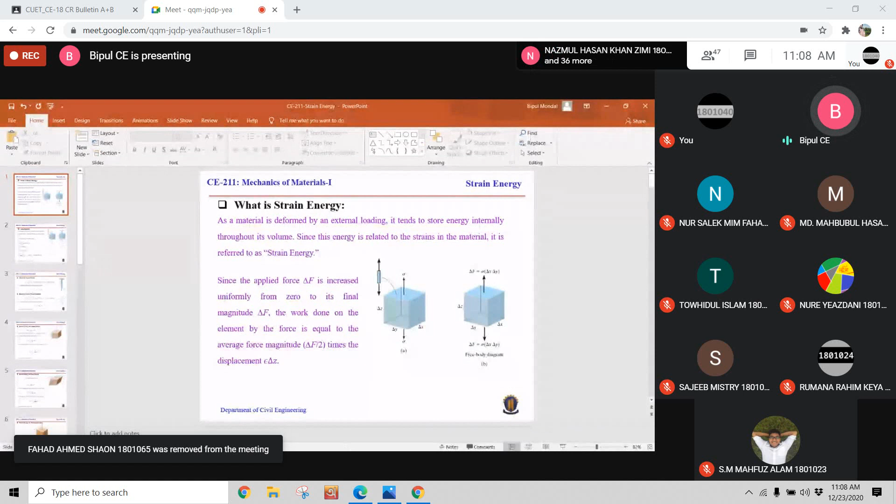Okay, so recording is started. So I can start the class. So today I will discuss another new topic.

That is strain energy. So all of you know what is energy. Energy is nothing but work, and sometimes work is known as energy.

So what is work? Work is force times displacement. That means if a force is displaced from one place to another, then work will be done, and the amount of work will be force times displacement.

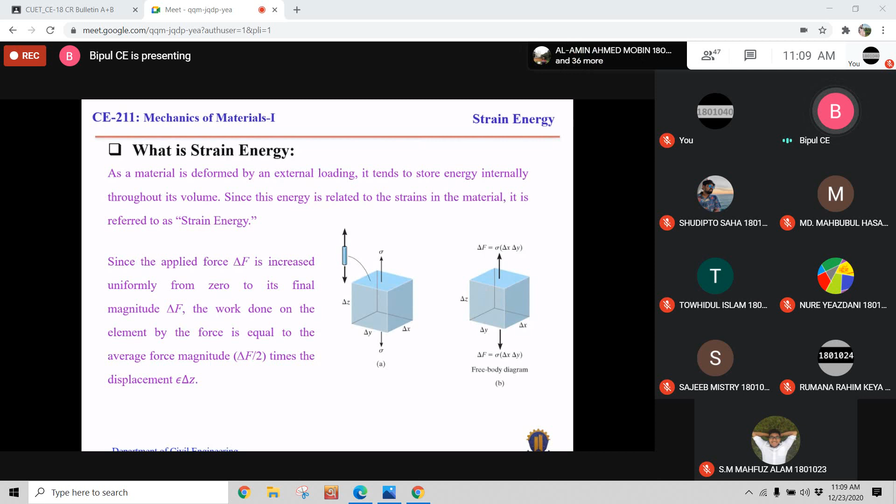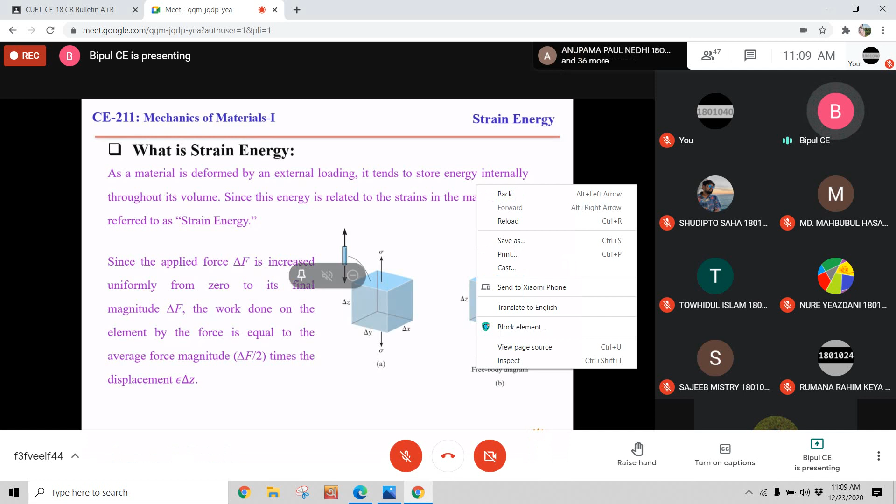So if any body or any structure is subjected to any kind of force, then there must be deformation in the body, and as the body deforms, the applied force must be displaced.

The displacement may be considerable or may be very small, depending on the applied force, but there must be displacement. So as there must be displacement, there must be work, and that will be force times displacement.

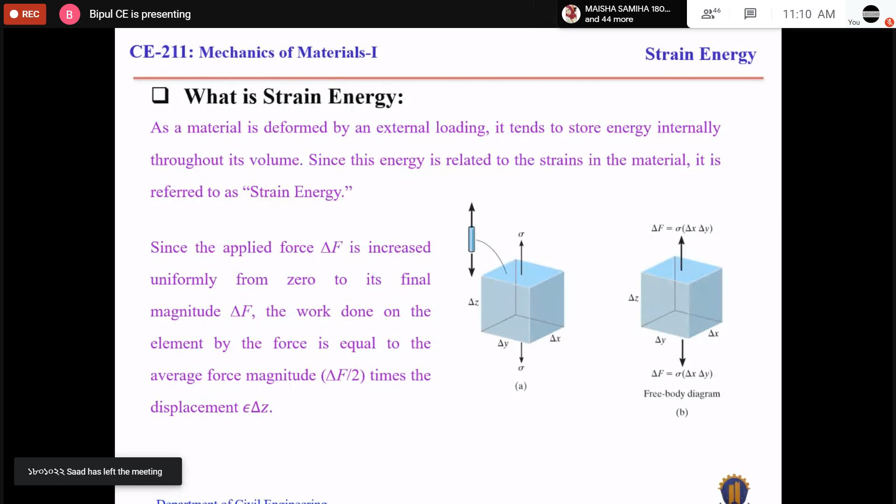In this case, displacement is nothing but the deformation of the body. So displacement is represented by the deformation of the body, so the work will be force times deformation, applied force times deformation.

That is the work, force times deformation. That is the external work, known as external work. Why is it external? Because it is done externally due to the externally applied force.

That is external work. And according to the conservation of energy, total energy is constant. No energy is lost. So according to the conservation of energy, that amount of external energy or external work will be stored in the body, and that energy is known as strain energy.

So simply, what will be the strain energy? Strain energy is nothing but the energy or work stored in the body due to the applied force. That is strain energy. So if we look at this figure, it is an element.

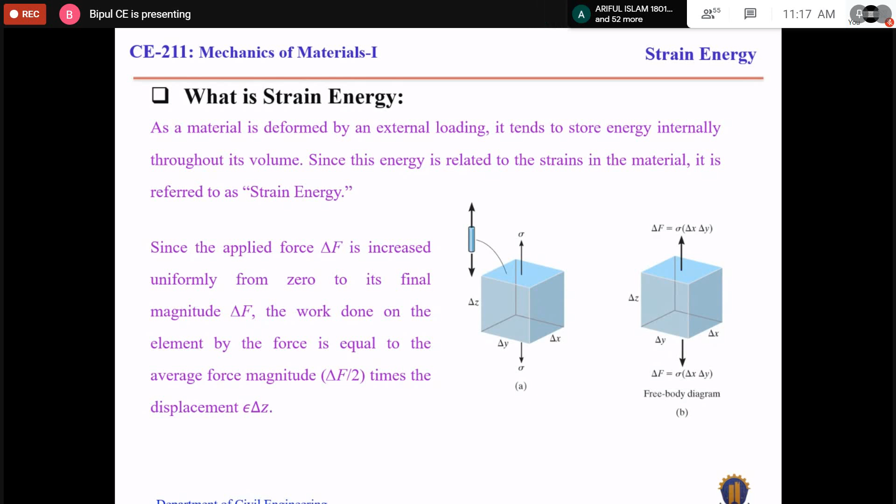This one is delta X, this one is delta Y. So total force is sigma delta X into delta Y.

In previous classes, I told you that to develop any mathematical equation, we always consider some assumptions. Similarly, to develop the strain energy equation, we have to consider an assumption. So what is the assumption?

Assumption means, if we apply any kind of force to any kind of structure, then there must be heat generated. Heat must be generated. And heat is also energy.

So basically, the applied energy or applied external work will be internal work plus heat energy. That means external work equals to work stored in the body plus energy lost by heat generation.

But for this type of problem, the heat generation is very, very small compared to strain energy. So we can assume that there is no energy loss due to heat generation. Therefore, the applied energy will be stored energy, or we can say external work equals internal work, and that is strain energy.

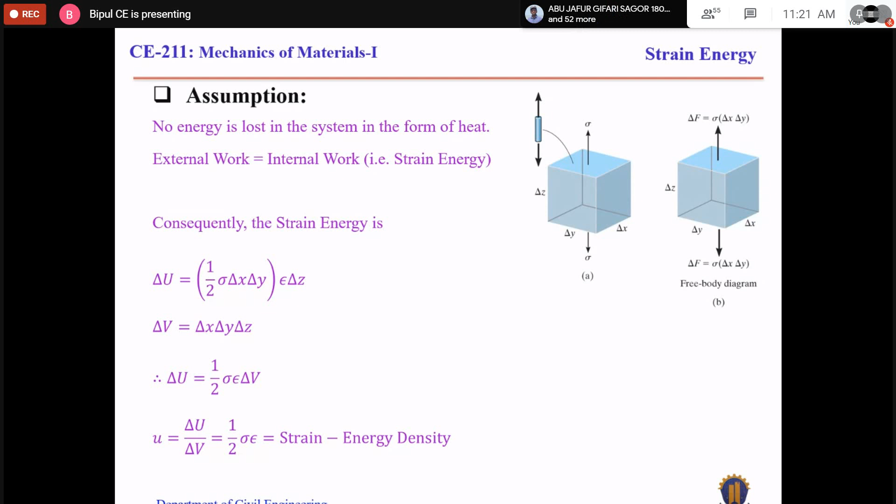Why? Because it indicates the energy stored in this amount of volume. So if we divide this total stored energy by the total volume, then we will get the energy stored per unit volume. That's why it is known as strain energy density.

Then external work done due to different types of forces. Sometimes the structure may be subjected to axial forces, which may be tension or compression. So if the structure is subjected to axial forces...

then the external work UE will be F into delta x, where F is the force and delta x is the displacement. And if we integrate over 0 to L, that means over the whole length, then we will get the total external work, and according to the assumption that will equal the total internal work, which is nothing but the strain energy.

And if the material is linear elastic, that means stress and strain are proportional to each other for any amount of applied force, then the equation of total strain energy will be half P delta, where P is the applied force and delta is the total deformation due to this applied force.

And the external work due to a couple moment. That means the structure may be subjected to couple moment, that is torsion, and we know due to couple forces, the displacement will be rotation. We know work equals force times displacement. If the element is subjected to moment, couple moment M, or torsion M, due to that torsion, the displacement is delta theta.

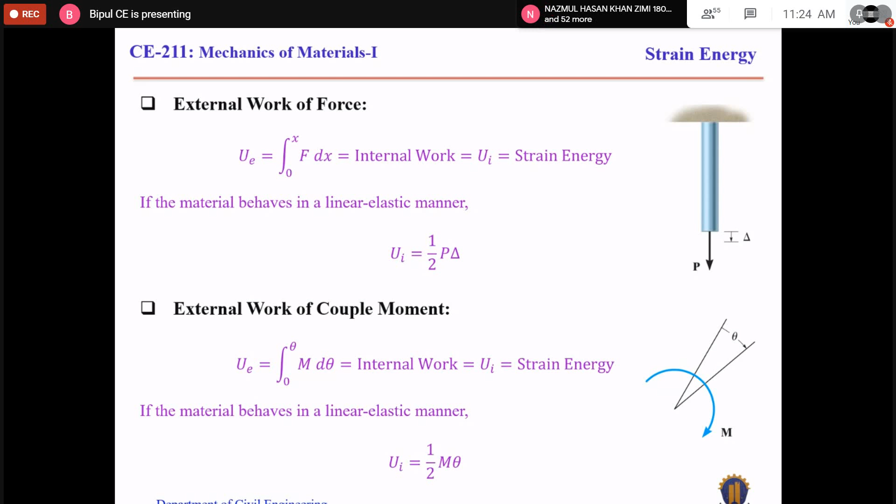So the work will be force times displacement, that is M delta theta, and to determine the total external work, we have to integrate over the entire rotation, 0 to theta. That is the total external work, and according to assumption, that equals internal work, this is strain energy. Similar to this, for elastic material, the total strain energy will be half M theta. M is the couple moment, not the bending moment.

dui, the strain energy, a small delta amount, which will be half sigma z times epsilon z dv, according to the previous equation. This equation indicates that the total strain energy depends on the volume. So to determine the total strain energy, we have to integrate this equation over the entire volume. This equation will give you the total strain energy.

If the material is linear elastic, that means stress and strain are proportional to each other, then the equation of strain energy will be sigma squared divided by 2E dv. E is the modulus of elasticity, and sigma is the applied stress. In this case, the element is subjected to uniaxial normal stress, that means this element is...

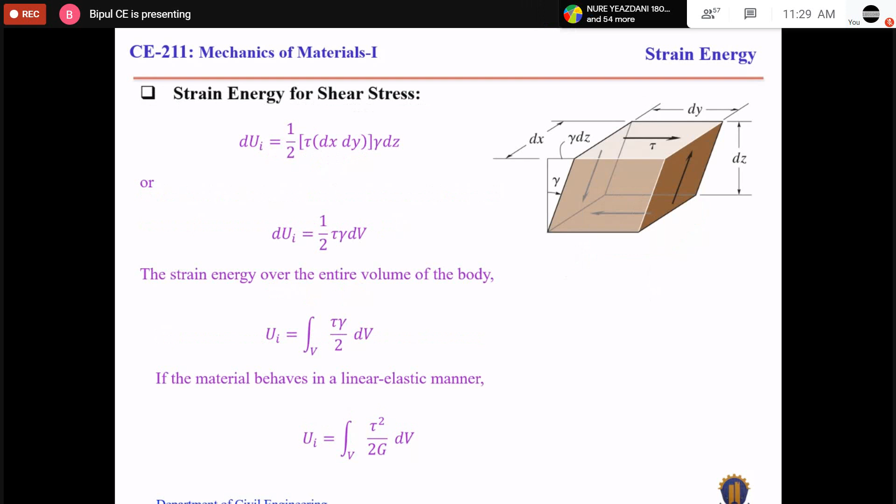So it is similar to the previous one. There is a similarity. For normal stress, the parameter is modulus of elasticity, and for shear stress, the parameter is modulus of rigidity. So the equations are similar, only the terms are different. For normal stress, it will be normal stress and modulus of elasticity; for shear stress, it will be shear stress and modulus of rigidity, but the patterns are the same: stress squared divided by 2E and shear stress squared divided by 2G.

Sometimes the structure may be subjected to multi-axial stresses, meaning the structure may be subjected to stresses along the x direction, y direction, z direction, and all faces may be subjected to different shear forces. For this type of problem, the total strain energy will be this one. This is the strain energy for multi-axial stresses.

So this equation is applicable for any kind of forces. You can apply this general equation for this case or for this case. This is the general equation because it is applicable for any kind of stresses.

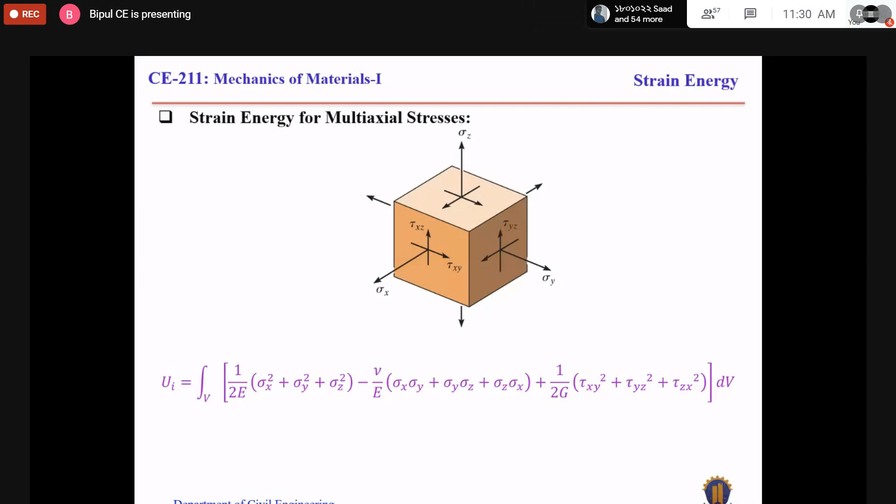And then elastic strain energy. That means if the material is elastic, linear elastic. The material is linear elastic means stress and strains are proportional. In that case, strain energy is known as elastic strain energy. And if the structure is subjected to axial load, then the equation of strain energy will be...

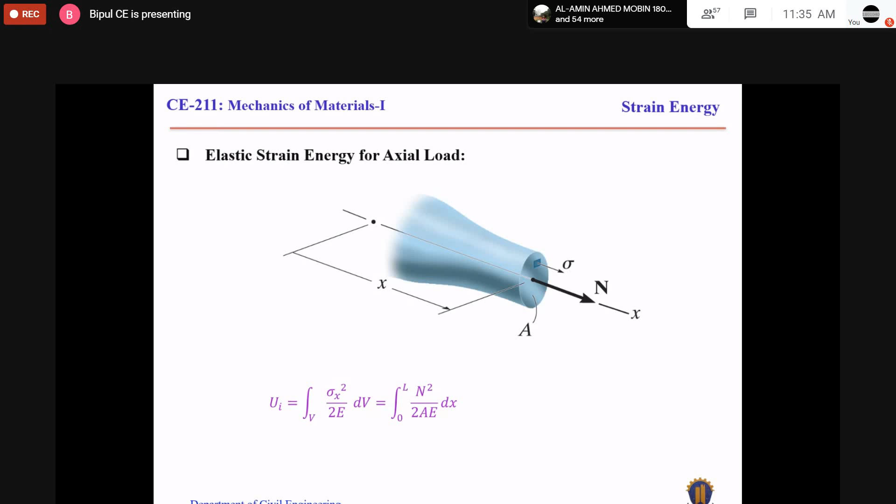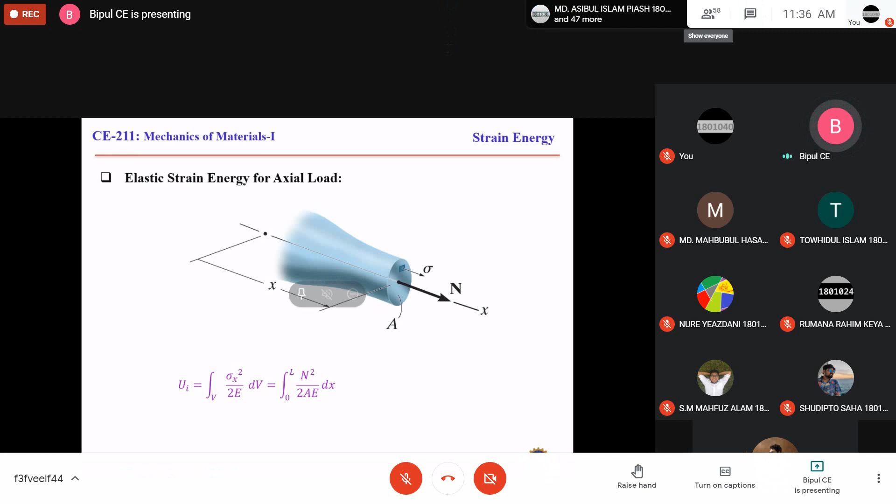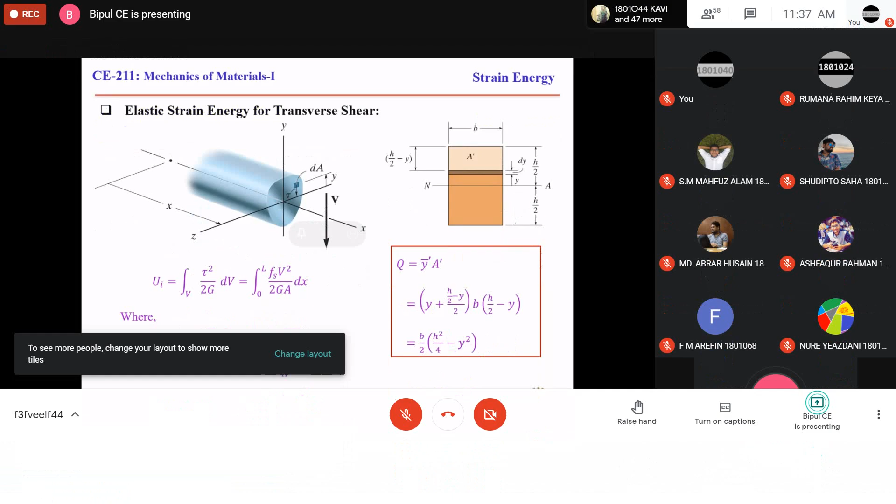Important for the final exam. Within this time you will learn what you mean by Q very clearly.

There is a similarity here. Applied force square over EI. So first of all, you have to understand what geometrical properties and material properties are related to what type of forces. So we know

this one is the modulus of elasticity, and modulus of elasticity is related to axial stress. So this one is normal force. So normal force is related to geometrical properties, cross-sectional area, and material properties, modulus of elasticity.

Okay, and come to here. So here the bending moment creates again normal stress. So the material properties will be, sorry, material properties will be E, and there is another term. The geometrical properties for bending moment is I. And for torsional force, force square divided by G.

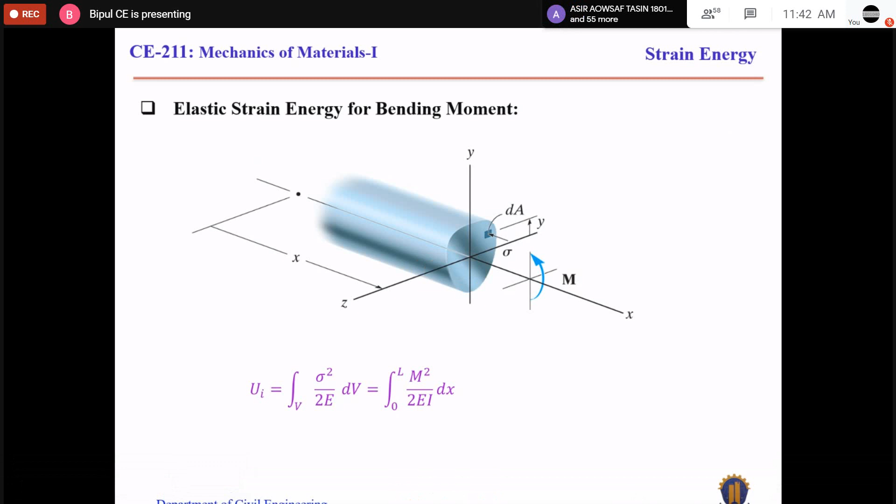So to develop the expression of internal moment in terms of variable length, what will be the origin? Somebody can say, okay, another assumption is EI is constant. E means modulus of elasticity, I is the moment of inertia. So this term is constant over the full length of the section, the full length of the beam.

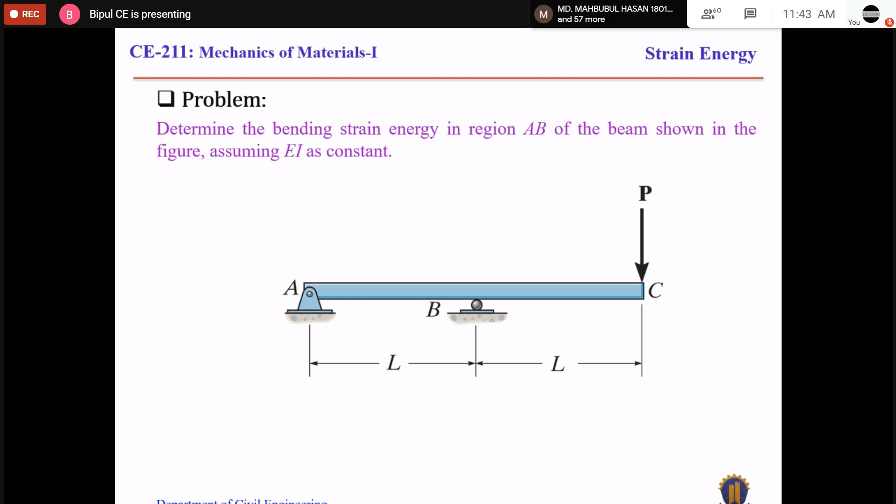So to develop the expression of bending moment, internal bending moment, in terms of variable length, what will be the origin? That means from where the length will be measured. Somebody can say we will measure the length from here up to this point. And another student can say, no, I will not measure from here, I will measure from point B, and I will go to A, because we have to integrate from A to B over this length. So somebody can start from here to here, or somebody can come from here to here.

So if one student goes from A to B, then origin will be A and upper limit will be B. And if another student starts from B and goes to A, then origin will be B and upper limit will be A. And another student can say, no, I will start from C. So if he or she starts from C, he will measure the distance from here but go from B to A to calculate the strain energy.

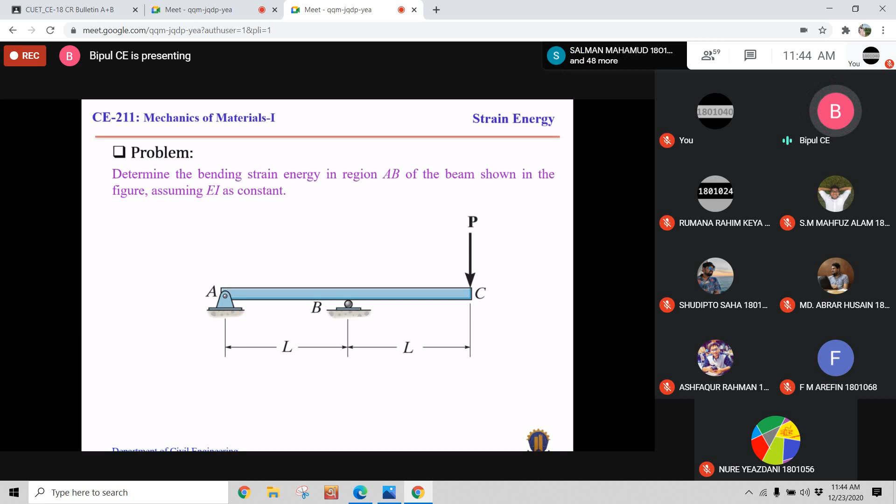So what will be the result? Which one will be the correct one? Basically, actually, all will be correct. If one student starts from here to here, it will give you one result. If another guy starts from B and goes to A, it will give another result. And if another guy starts from C, it will give another result. But ultimately, you will see that all three results are the same. That means you can consider any point as origin to measure the distance.

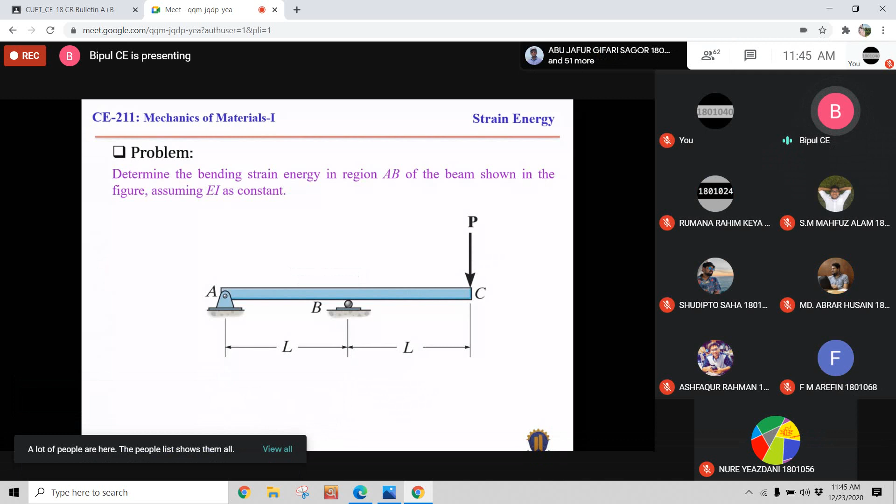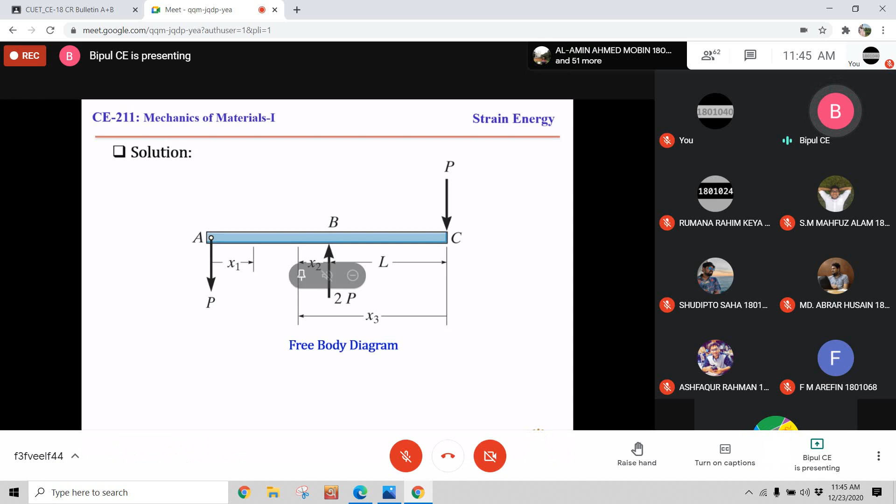We have three equations of equilibrium: summation of Fx, summation of Fy, summation of bending moment. As we have three equations and three unknowns, the structure is a determinate and stable structure. So after solving, the reaction at A will be downward P, and the reaction at B will be upward 2P, and this one is the applied force.

One guy can start from A, considering A as origin. In that case, the variable length is x1. Another guy can consider point B as origin, in that case the variable length will be x2. But look here, if one guy considers this point as origin, he will not go this way, he has to go this way, because we have to calculate the strain energy within this region. So the variable length will be within this region, it will not be here.

So if one guy considers point B as origin, then the variable length is x2. And if another guy considers this point as origin, then the variable length will be x3, because x3 will not terminate here.

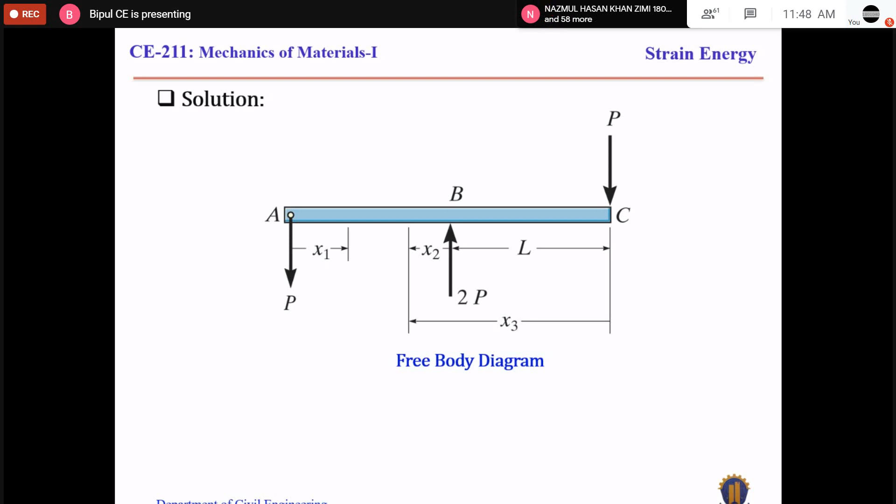So if we take a section here, you can consider the left part or right part. For this case, we can consider the left part, because it is a little bit simplified. The right part is a little bit complicated.

So if we consider the left part, this one is the internal bending moment. That means this amount of bending moment will be developed at this section due to the applied force. So this is the free body diagram, this one is the reaction, there will be a shear force, and this is the bending moment.

To express the bending moment M1 in terms of x1, we take summation of moment about this point equals to 0, with clockwise anti-clockwise positive according to sign convention. This one is anti-clockwise, so positive M1, and the reaction develops anti-clockwise moment, so it is also positive, with value P times x1. So M1 equals minus P times x1.

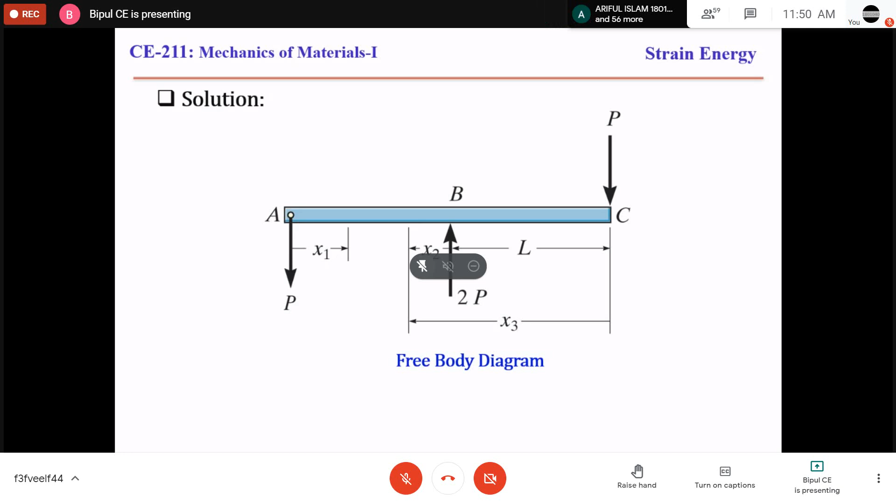So here the range is 0 to L, and after calculation, the equation of strain energy is P square L cubed over 6EI.

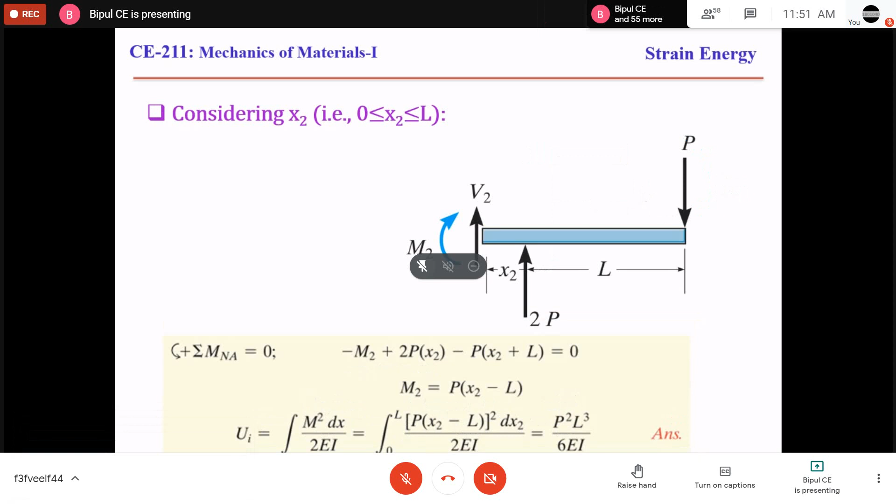For the next case, if another guy considers B point as origin, the variable length is designated as x2, you don't necessarily need to label it x1, x3, x4 etc. Here the value of x2 is 0, and you have to reach to A, where the value of x2 will be L. So the range of the variable length will again be 0 to L.

To express the internal moment in terms of variable length, you again take the section and consider any part, left or right. For this case we consider the right part. So this is the internal moment, clockwise moment, this is the shear force for the free body diagram, and this one is the reaction at point B and the applied force.

To express the moment, apply summation of moment about this point equals to 0. This one is clockwise moment, so negative; this one creates anti-clockwise moment, so positive, with value 2P times x2. This force creates clockwise moment, so negative, with value P times this distance, which is L plus x2. So the moment is P times L plus x2, negative because it is clockwise direction.

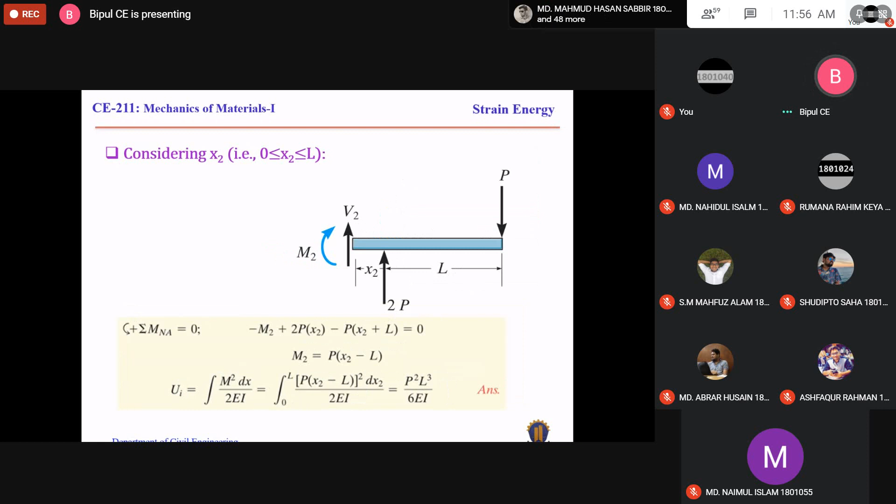After calculation, the equation is P squared L cubed over 6EI. Look at all of these three equations: it is PL over EI giving P squared L cubed over 6EI, this one is P squared L cubed over 6EI, and this one is P squared L cubed over 6EI. So for all cases, the equation of strain energy is the same.

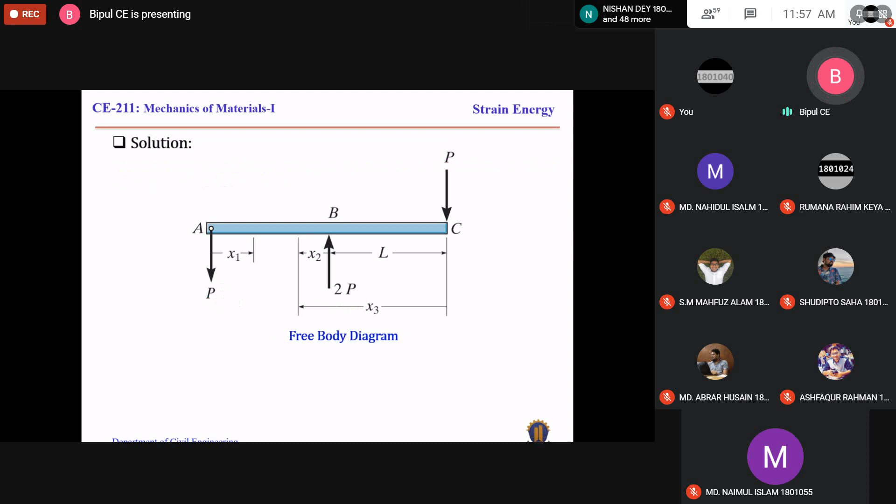Actually, the purpose of showing three cases is to make you understand that you can choose any point as origin to measure the variable length. It will not affect the final result, so do not worry about that. One student can choose this point and another student can choose another point as origin, it will not affect the final result. You can consider any point as the origin to measure the variable length. So that is the end of this topic.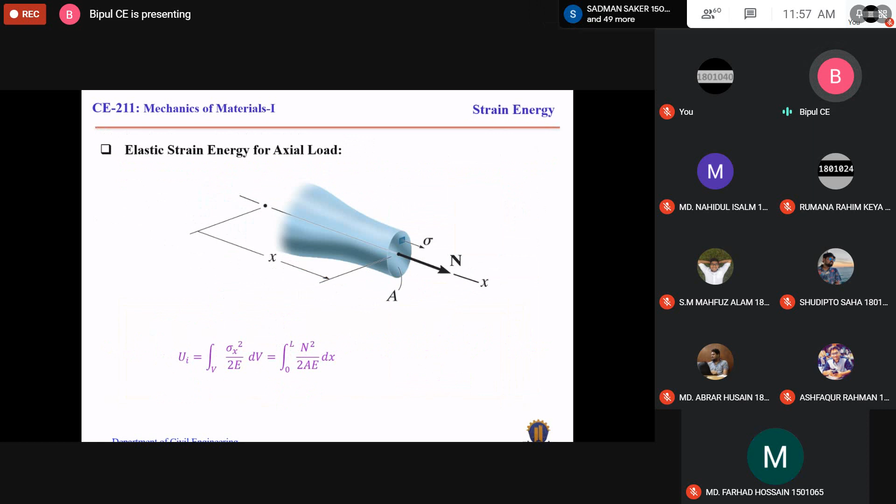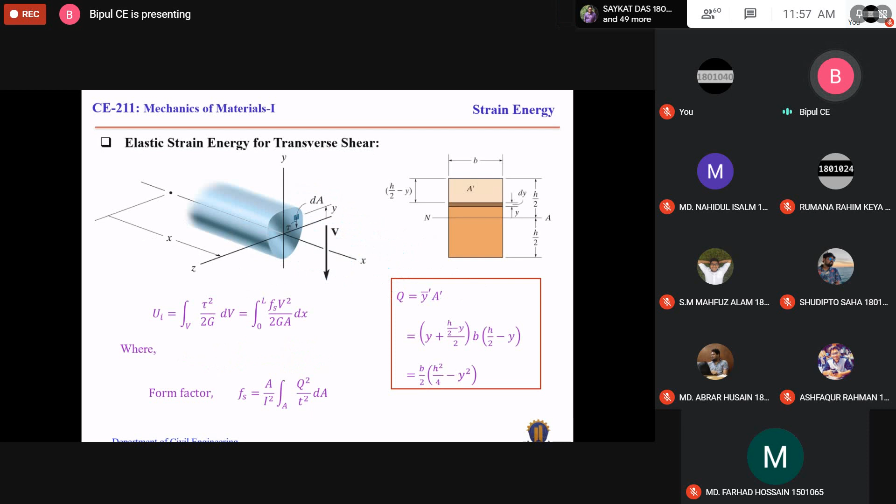There are other problems. I have explained one example, but in class tests and in the final exam you will see other types of problems, but all are the same. In case of axial force, you have to express axial force in terms of variable length. In case of bending moment, you have to express bending moment in terms of variable length. In case of shear force, you have to express shear force in terms of variable length. In case of torsion, you have to express internal torsion in terms of variable length.

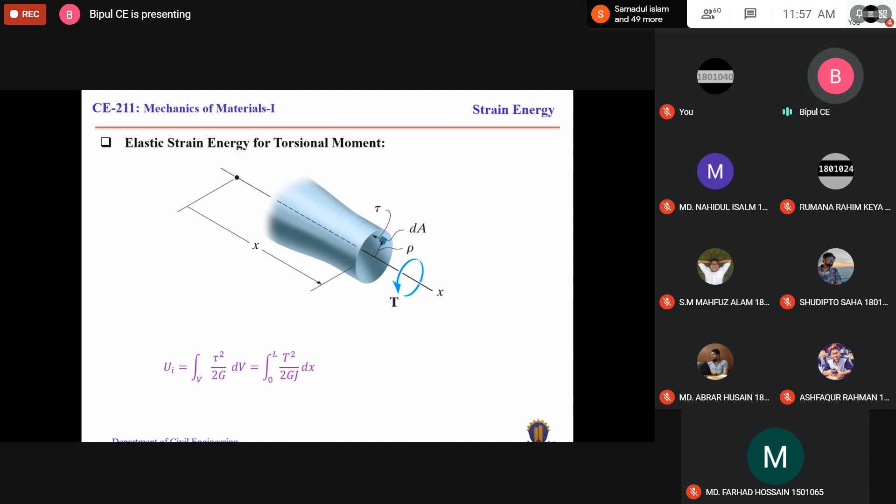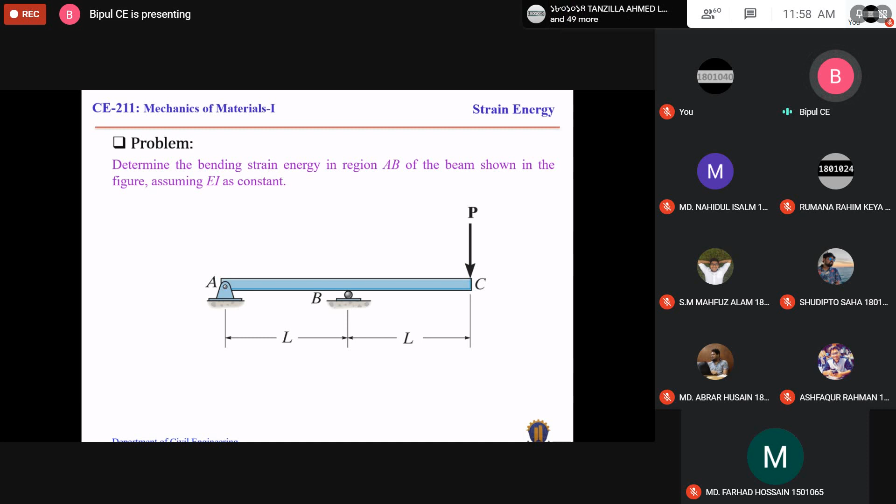Our procedures are the same for all cases, only the applied force will be different. For this case, the applied force is bending moment; for other types it may be axial force, and for other types it may be torsional force. But the procedures are the same for all cases. You have to practice for other types of forces. I am following the Hibbeler book, you can also follow that book if you want, or you can also choose other books.

Any question? I think you have no question.